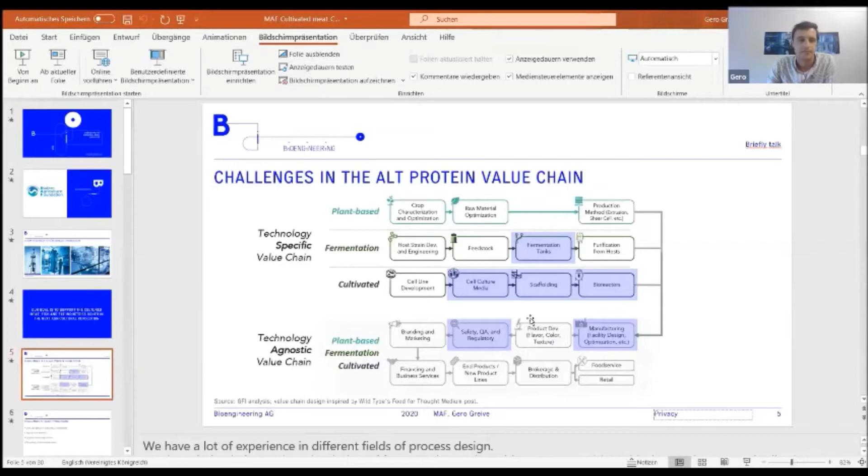From the process perspective, we have four challenges. The cells are grown in suspension or adherent. We need appropriate aeration. The agitation and the shear forces are every time a problem. And recycling the cell culture media is one thing which can help you reduce your production costs.

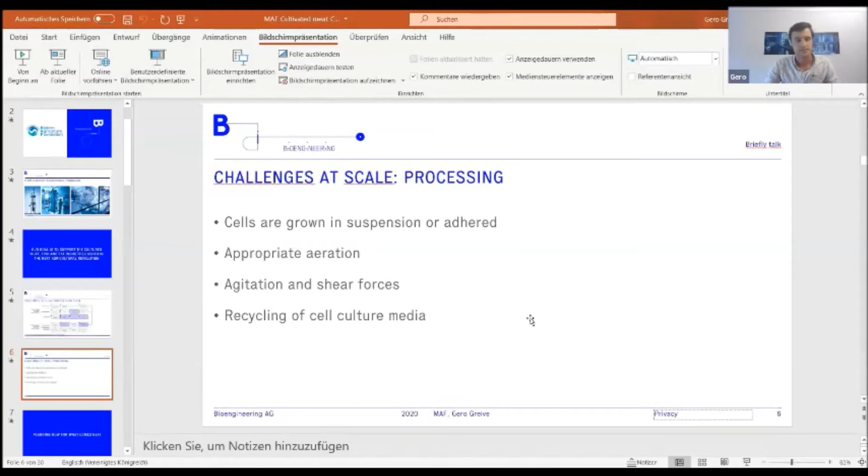When we plan for what comes next, it's definitely the selection of the right pilot bioreactor. Most of you are in the lab or bench phase, and you're dreaming of a biofarm or a 100,000 liter bioreactor. But at such a big scale, there are a lot of problems, for example reduced mixing efficiency, reduced KLA. In a big vessel there are gradients: temperature, oxygen, pH, and of course substrate gradients.

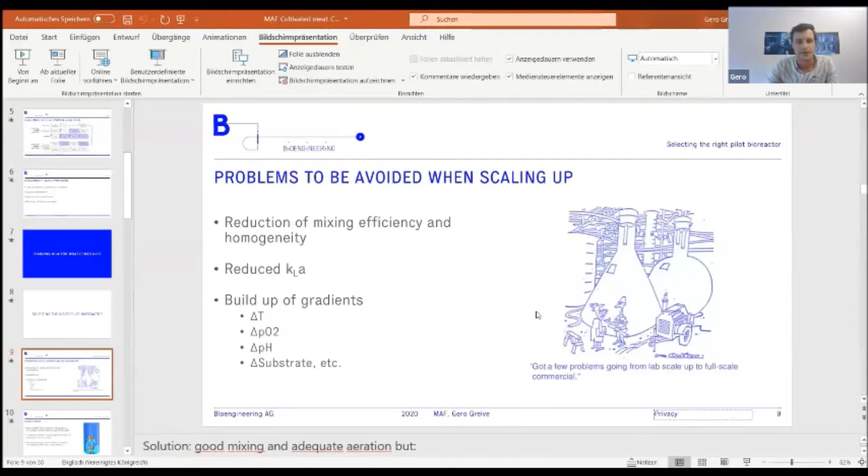To solve all these problems, mixing is the first choice to make the process more efficient. But with mixing comes the shear forces and shear stress points. In general, shear stresses are generated by mechanical forces induced by the friction of the liquid on the cell surface, and these shear forces have a negative influence on the viability of the cells and on the yield.

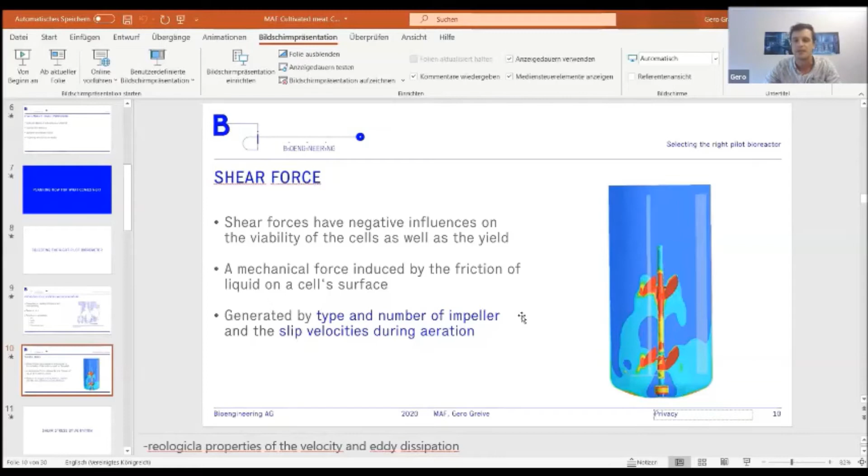These shear forces are generated by two types. One is the type and number of the impellers, as you see here on the right side, and the other is the slip velocity of the aeration. This isn't commonly known, but the velocity of such a bubble also generates shear forces.

I'd like to quickly go to shear stress by agitation. Finding the right agitation strategy is very important. For example, here we have a correlation between oxygen transfer, aeration, agitation, and vessel internals. When you look at it, you'll see that with lower motor speed, lower RPMs, and a lower aeration rate, you can generate higher KLA values than with high RPM speed and high aeration rate.

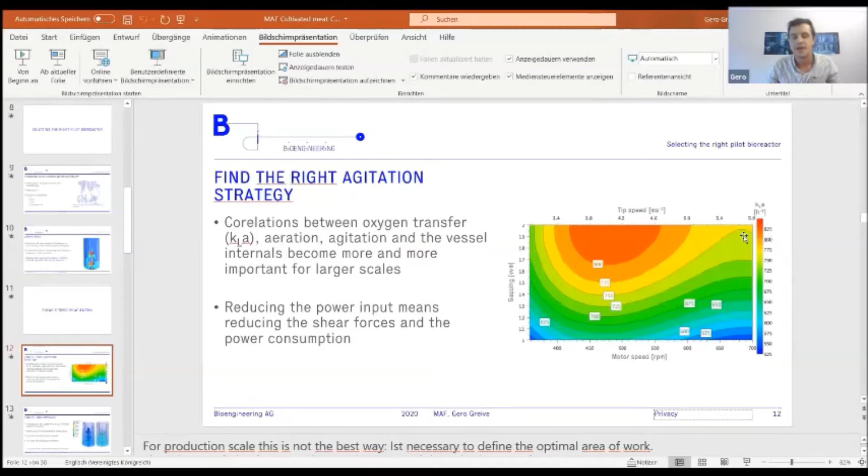This isn't what you normally do on a bench top. When you need more oxygen in your system, you raise your aeration and your speed, right? So this isn't scalable for 200 cubic meters and more. We have to focus on reducing the power input, because this means we can reduce shear forces, and of course reduce power consumption and production costs.

It's also necessary to find the right impeller. The homogeneous flow pattern you see on the right side is better for the cells. I think as a cell, I would like to live in the right side bioreactor, not the left side one. But the left side bioreactor is still common practice. With the right side design, you can keep your microcarriers or cells in suspension, increase the dwell time of your gas bubbles, and increase mixing performance, all of which helps improve your yield and shorten the batch duration.

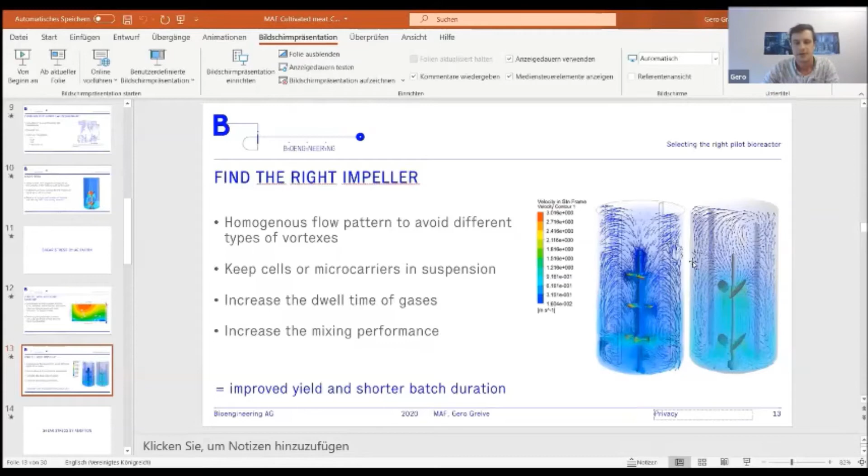The other issue was shear stress by aeration. Sparging is still a robust and well-known method for oxygenation, that's for sure. But cells can adhere to the bubble surface and rise up together with the bubbles. This brings slip velocity and, of course, shear forces. And when the bubble reaches the surface, there's a high energy dissipation rate as it bursts, which will kill your cells.

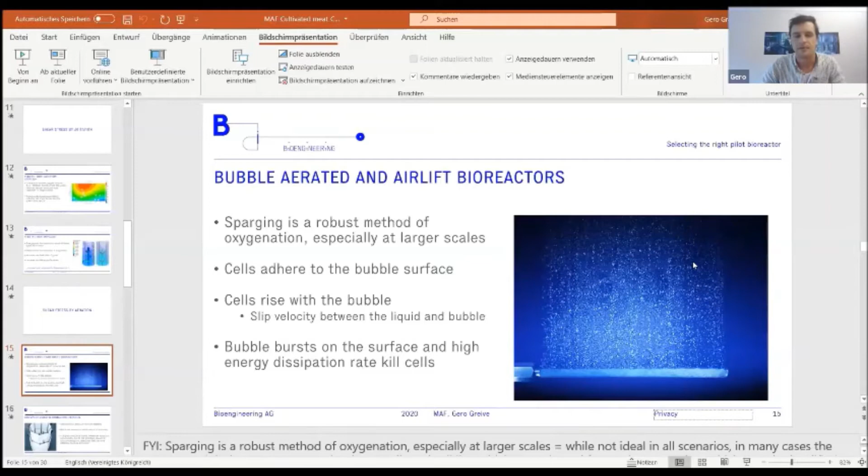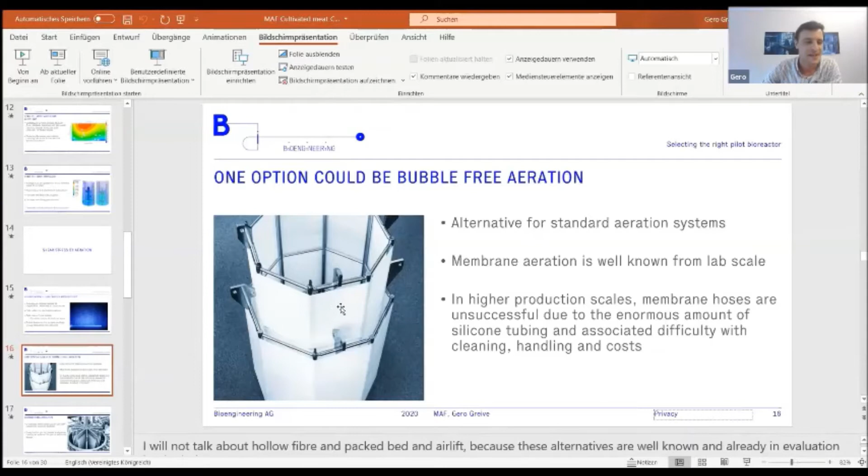So there's an alternative: bubble-free aeration. It's well known at the lab scale. Imagine this is a silicone hose on a cage, and when you have to do this job several times on a 1,000 or 100,000 liter bioreactor, spinning this hose around the cage, you'll get crazy. So this isn't a good upscaling option for bigger volumes, but for the lab scale it's okay.

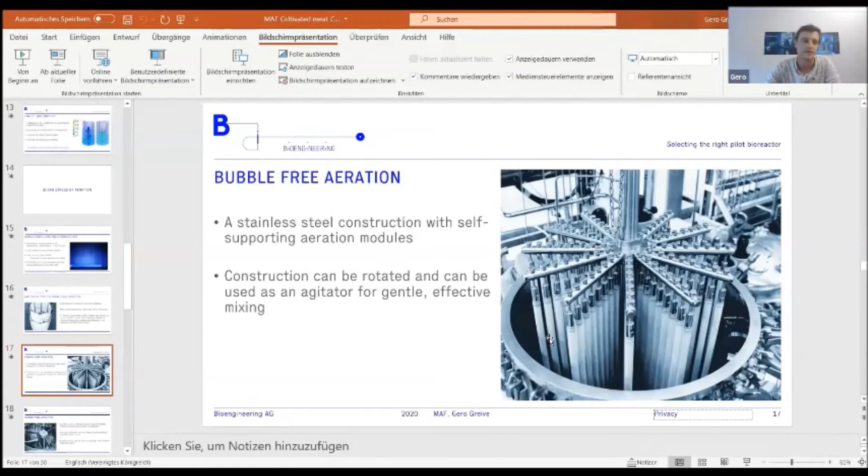For bigger volumes, you need a stainless steel construction with self-supporting aeration modules, a silicon glass fiber combination. This construction can be rotated and used as an agitator for gentle and efficient mixing inside your bioreactor. It can be washed down, CIP, SIP, no problem, and used several times before you have to change the modules. This is one way you can aerate your cells bubble-free and reduce shear forces in the system.

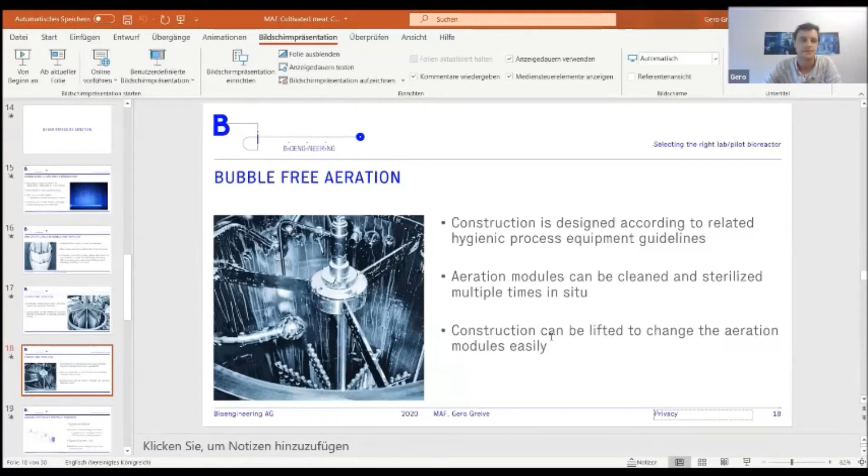So I would like to summarize this technical part of the presentation. When you go back, maybe you can check your system if it is possible to reach a geometrical similarity in your benchtop reactor, for example.

It means the stirrer is scalable, which is the ratio between the vessel wall and the stirrer. Is it a single-use system, a wave, for example, which is not possible to scale up to 100 or 200,000 liters? You have to think about the agitation and gassing parameters. As I mentioned before, it's critical to realize 1,200 RPMs in a 200,000 liter bioreactor. That's more or less not possible.

I typically recommend a 200-liter bioreactor for a good upscaling process with a multifunctional design for your process intensification. With such a volume, we can generate a lot of parameters, which helps us to quickly scale up your process to 2,000 or 10,000 liters.

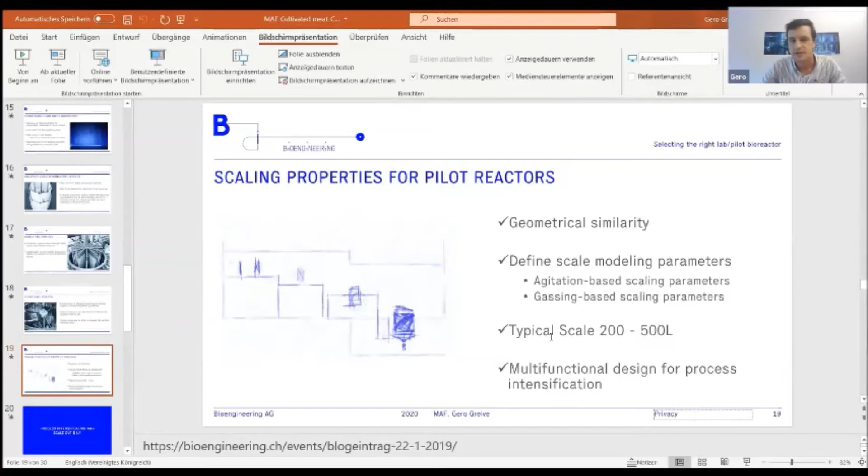The process intensification is definitely one of the things we have to look at. We will do a very fast upscaling because the timeline, the lead time, is very short, which you're looking for. For example, I made this slide to show you what is possible when you come from your self-fundings, etc., or from your process intensification with the 200-liter bioreactor. You're very close to a market test train, which is around 2,000 or 5,000 liters. And up to this point, you can optimize your process. That's not a big issue.

We can design the process in multifunctional equipment. So you can add perfusion systems, add some other probes, do some inline measurements, etc. But when you shift to the next thing, to the regional and commercial scales, you have to finally define your process. It's necessary to know all the parameters for upscaling, for agitation, for aeration, pumpings, etc. And the other thing, I already talked about this 100 or 200,000 liter bioreactor.

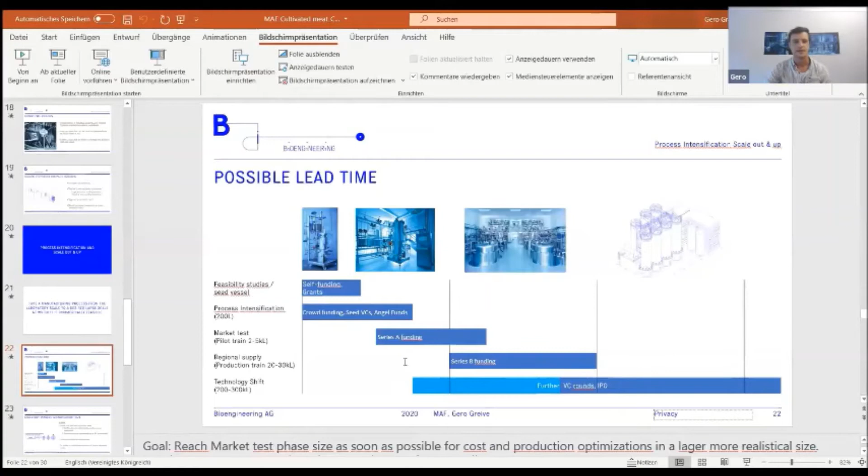I would like to explain some points we discussed in a case study, actually. We finished our design of the market test train. And as I mentioned before, we design it in a multifunctional and flexible way. It is very interesting - in this train, you can use the upstream vessels and also as the downstream vessels, just by changing the agitation system.

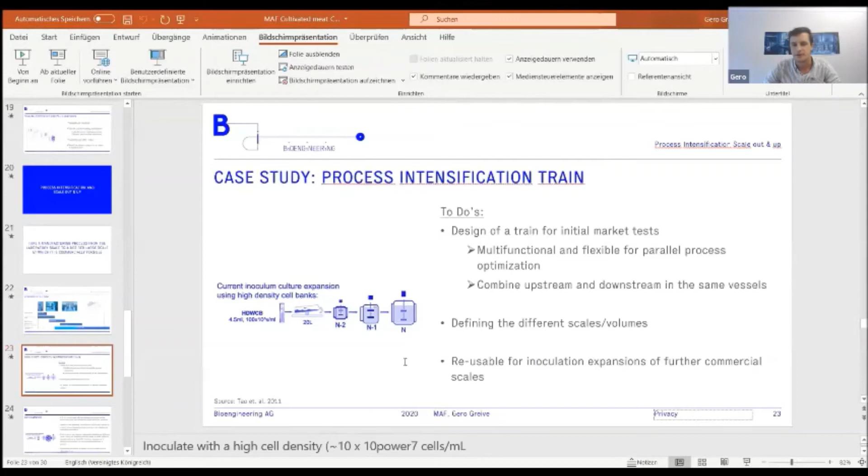We defined the different scales for the different steps, and we are looking for reusability of this train for inoculation of the commercial scale plant. So our next steps will be - the N-3 is a rocker, a wave bag, and we would like to implement a continuous system and delete this rocker system. A continuous system to inoculate several seed reactors, because our goal is to generate a more or less continuous production.

And we are also looking forward to reduce the N-1 step, because this can help us to reduce the production time. We're still working on all these ideas with our customer, as I mentioned before, in this 200-liter bioreactor to get the necessary process parameters.

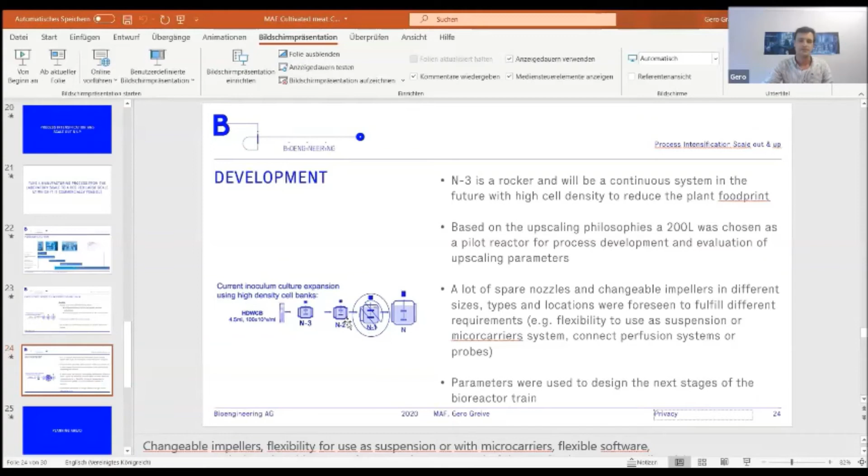So planning ahead, our next steps for the customer, who is still working on it, is process optimization. You try carrier scaffolds, but you also would like to do it with cells which are just in suspension. As my colleagues from Bühler already explained, bioprinting is a point you have to look at. Market testing, how is the acceptance of the customers, and also the regulatory approvals, are an open thing.

Next steps for us are actually the design of the supply, the regional supply reactor, the 20K liter bioreactor. We have a small team which is working on the technology shift for these multi-factory worldwide commercial scale plants. And we have to define the relation between the scale-up, meaning in volume, and the scale-out, meaning in area.

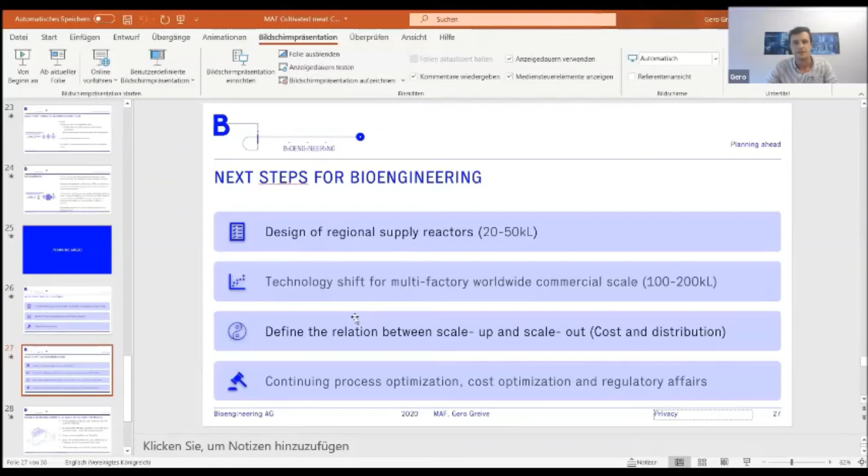So this is a discussion about the biofarms or the big facilities which we know from insulin production or other yeast productions. The continuing of the process optimization together with the customer is very time intensive, and of course the cost optimization and the regulatory affairs are in our point of interest.

So how to quickly achieve some commercial scale for you to capture the market now. These are 5 points I would like to give you to think about.

The novel designs which are in the room are great, but they required a lot of time for the proof of concept. And time is, it's a very quick market, you know it better than me.

The multi-purpose design is always possible, but I strictly recommend to get in touch with the equipment supplier very early to explain your problems, your ideas, and also the reusability and flexibility of such a plan must be provided to your equipment supplier very early, because then we know how we can design, how we can help you to design such a flexible plant for your research and scale up things.

And when the test market plant is reached and you have a test market train, then I think the bottleneck will be the funding, because the equipment lead time is more or less a maximum of 1 year, for example. But the funding rounds always need so much more time.

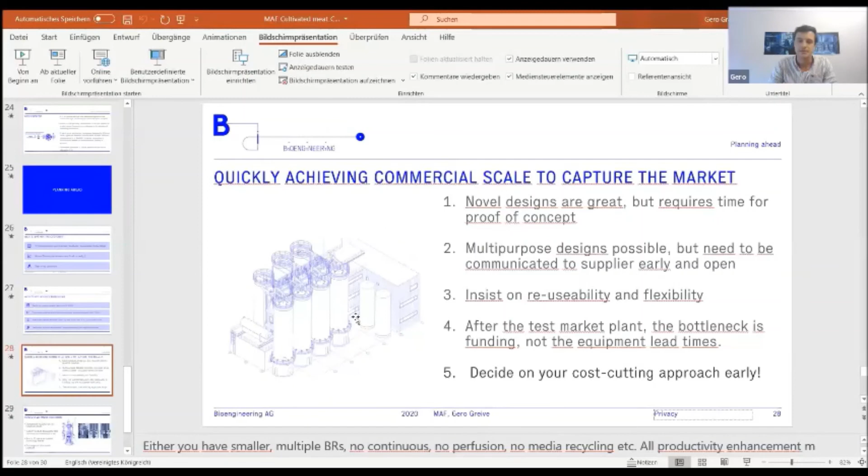And when we work together just from the beginning, we can bring in our experience, you can bring your experience, and we can work together to design the first a bigger vessel, let's say this 200 liter bioreactor, and with these parameters, we can definitely save a lot of time in this upscaling issue for the cultivated meat production.

Yeah, so I will come to the end now, and I'm open for your questions, and would like to say thank you, and yeah, here we go.